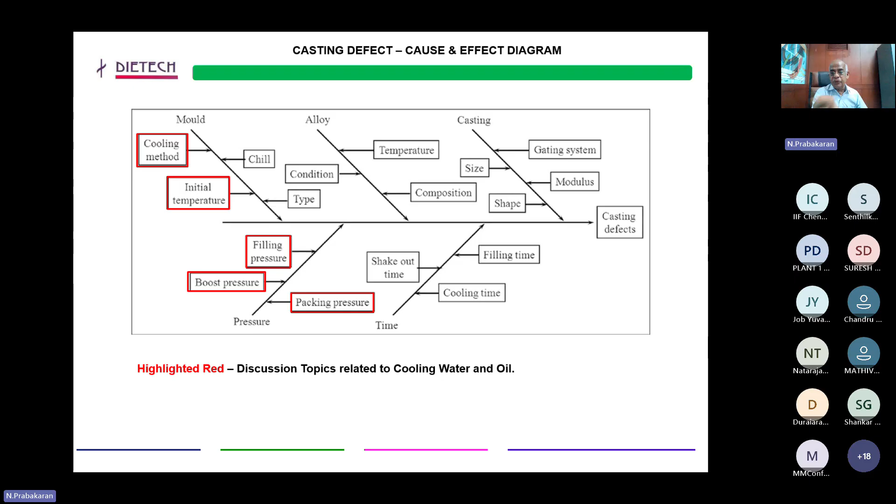What we are talking about is the temperature, the cooling method, filling pressure, and boost pressure, packing pressure. These are all the areas which we are going to concentrate on through die chillers and oil chillers, in turn reducing the rejection level from these elements.

Now I have presented this slide where I am going to show which area I am going to cover regarding the rejections and reduction through die chillers and oil chillers. Probably I will present it in this way.

Probably we will start the cycle at a temperature of 100 degrees. We will have warm-up shots which get rejected, around 10 numbers. From there it goes to the first part approved stage, where the die temperature reaches from 100 to 200 degrees. That 200 degrees is just a reference; according to the casting configuration and other factors, it will vary. I have taken 200 degrees as a reference.

So that stage after warm-up shots, the second stage, is nearly the first part approval stage, which is also 10 to 100 cycles. From those 100 cycles, I'm assuming process parameters are settled, and then casting gives a minimum percentage, around 3 to 4% or 5% rejections.

After that, there will be start and stop stages, which are also included in the production stage itself. If your start and stop time is very less, probably it will not drop below 200 degrees centigrade, and then we can take the further cycles forward.

What the die chiller is going to play a role in is reduction of casting rejections in the production running stage. That is the second stage, and probably the third and fourth stage, as you can see. This stage and this stage is what we are talking about regarding reduction, the production running at this required temperature. This is what I am going to deal with.

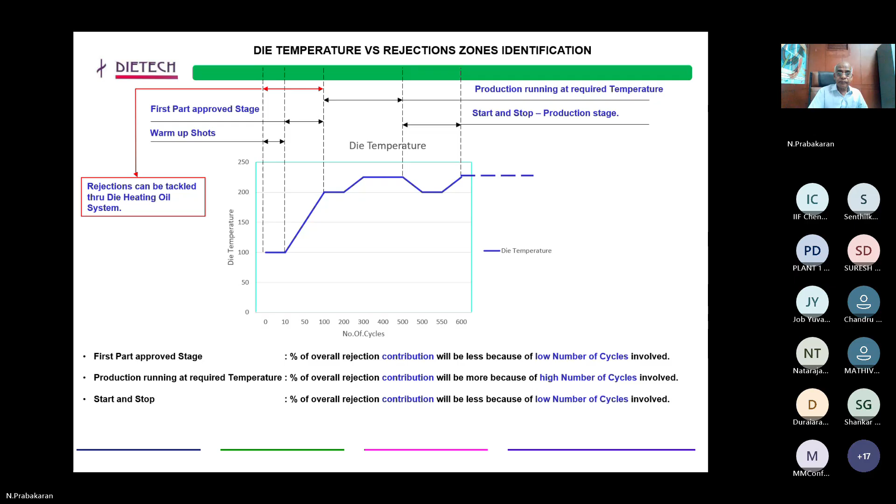Now, normally one more identity - these are all the inputs for further slides. So the die temperature, if I'm doing it through a thermograph, normally the high die temperature lies with the sprue bush and the spreader. Even one more clue I'll give that.

If you want to increase productivity, you want to reduce cycling time, even we can measure biscuit temperature to tackle it, probably improving the cycle time. Normally we used to talk about casting temperature, but rather we can take into account biscuit temperature reduction as one of the ways to go into productivity and reduction of cycle time.

Normally these two zones are always very high temperature; very high temperature will always be there in any die if you are talking about it. The sprue and spreader are the most highest temperature points in the die.

So normally, why am I putting this table in front of you - this analysis shows we could see 80% of the rejections almost coming onto porosity. Porosity is divided into two stages: one is air porosity, another is shrinkage porosity. Apart from that, some rejections we will always be calling - you can see all blue highlighted, all are related to temperature.

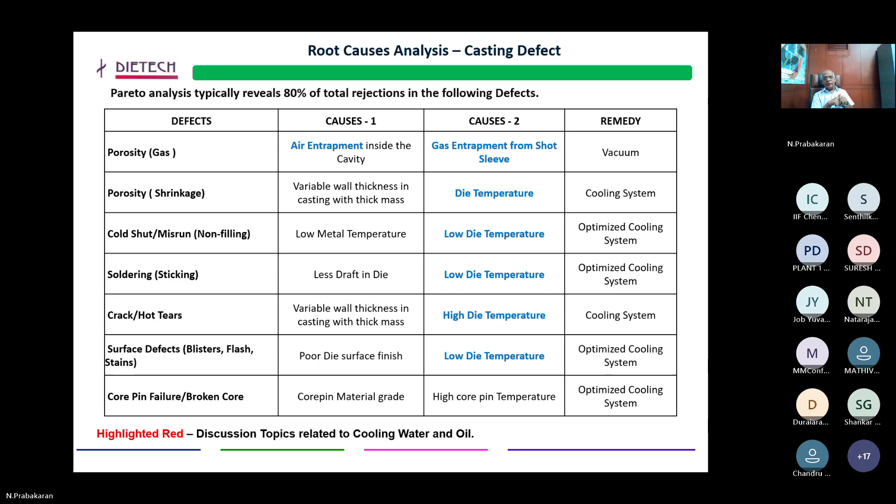Now this is about root cause and other things. These are additional points. Probably people will think I'm going to discuss total rejection reduction overall, but no, it is not so. My purview is only shrinkage related casting defects, how we can reduce it. This is only the essence of this paper. I am highlighting the direction I am going to take, and also highlighting other directions which are not dealt with here.

That's why I am putting up this slide also. The discussion topic relates to cooling only, which is a concurrent factor for first phase and second phase. Poor position of the die, poorly designed - one more thing I am talking about is proper die design.

This is going to be a big subject - how the die can be designed in such a way that less rejections can be produced. Today's requirement is almost nil rejection. That is the approach the die design has to go towards - how the die can produce nil rejections if the process parameters are well controlled.

This is a combination of die design and the process of die casting. Both should work in such a way to reach minimum rejections, even with a target of nil rejections. So probably this will be an eye opener in die casting, what I am saying.

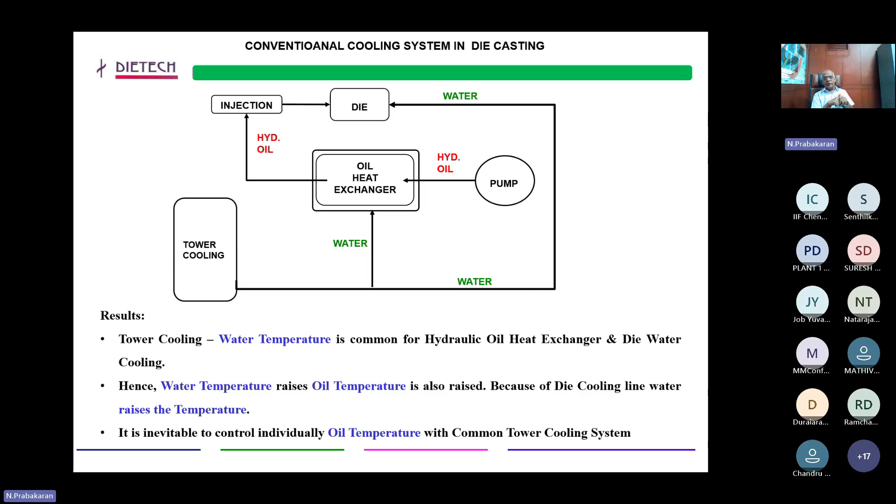This is the improved cooling system. What I want to show is there will be one oil chiller and one die chiller. So oil chiller, this is the die chiller. The die chiller will take care of the die, and the oil chiller will take care of the oil. So it is separated out now.

The total oil heat exchanger is removed. In the chiller, directly the media is oil, going in and coming out. No water is inside. Only oil is taken to the chiller and then gets into the oil tank. So we constantly maintain the temperature, whatever you want, 35 or 40, based on your requirement. This die temperature is in no way connected with the oil temperature. This is the best advantage.

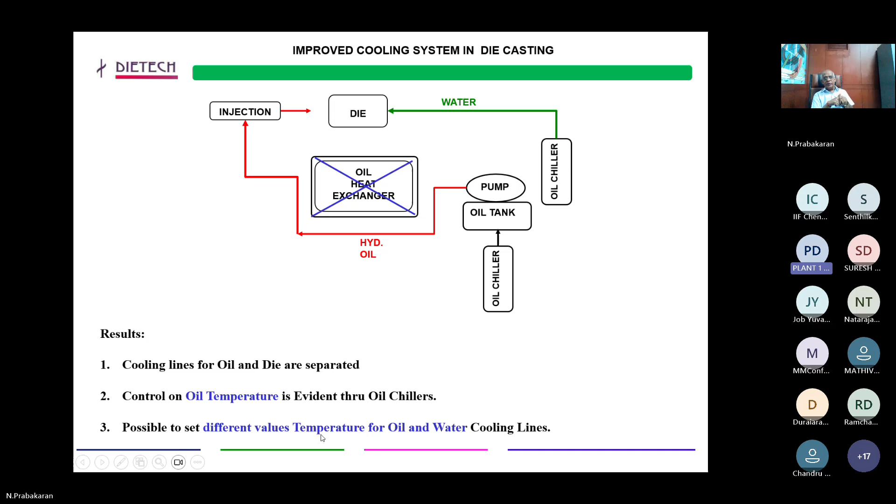And what are the advantages of separating out the chillers? This is a water chiller, this is an oil chiller. Now let me tell you what could happen in oil.

What you can see here, there will be almost a 45-degree slope for this. If the temperature goes up, your viscosity will go up - nothing but the viscosity is reduced. So when the viscosity is reduced, you know very well the pressure drop will be more because of the viscosity reducing, or the viscosity number is more. Your thinness will be more, so your pressure drop will be more. Almost you can say 45 degrees, the slope is very high.

Suppose the slope is only around 10 degrees, there is not much value. But when I'm seeing the pressure drop curve, which is given online, nearly 45 degrees means it's equal - whatever the problem here, this will be transferred into the pressure drop.

So now we can see, if you are raising the oil temperature by 10 degrees, your injection consistency will also vary. Suppose certain castings need not have much sensitivity on the injection side, but for most of the castings - I'm talking about 60 to 70% of castings - if we are able to maintain the injection force consistency equally, then the casting produced will be consistent in quality. So this is very, very important.

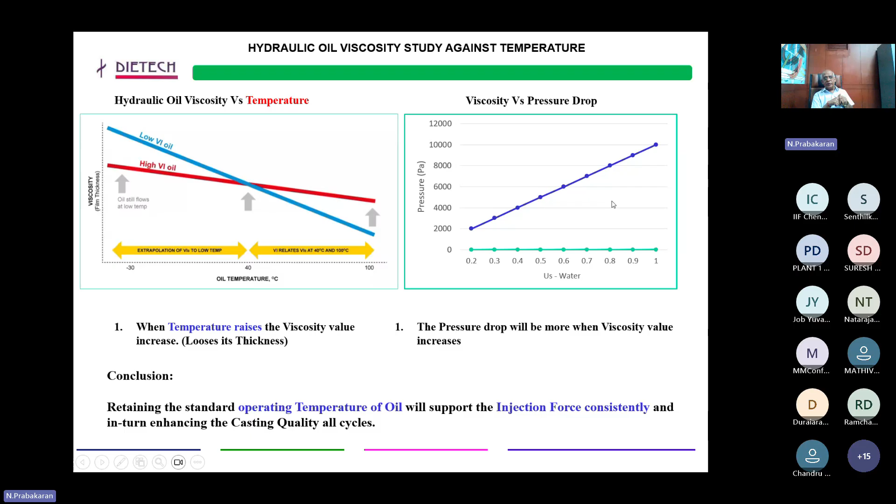We have to maintain the viscosity of the oil, so that pressure drop will not occur, and you will get consistency in the injection force.

Now another function I am talking about is the closed loop circulation system. Closed loop means no pollution will take place in between the chiller and the oil - everything is closed loop. That will be the big advantage. There also is a closed loop, but through an exchanger. But with water cooling only, we used to have a lot of pollution.

You know very well the problem they are facing today in heat exchangers - the cleaning or maintenance is very high because every 3 months or 6 months they have to be cleaned. Otherwise, the oil temperature will go up. All these problems exist today in conventional die casting machines. Conventional cooling systems will have this problem.

And hydraulic oil circulates under pressure - that's another big advantage. It absorbs frictional and mechanical heat. If you're using the hydraulic oil chiller, it will be pumped with a little pressure, 2 bar or 3 bar, because another pump is running inside. So it absorbs frictional and mechanical heat, ensuring the oil retains the designed viscosity and lubricant property.

That is ensuring oil - this is the advantage of that chiller, I'm talking about the oil chiller - maintaining the ideal temperature, typically between 20 to 35 degrees. This is possible, and we can even bring it down below atmospheric temperature. Suppose we want 5% or 10% more injection force, you can slightly increase it by 2 or 3% consistently. If you want more, we can think of reducing the oil temperature further and taking more force.

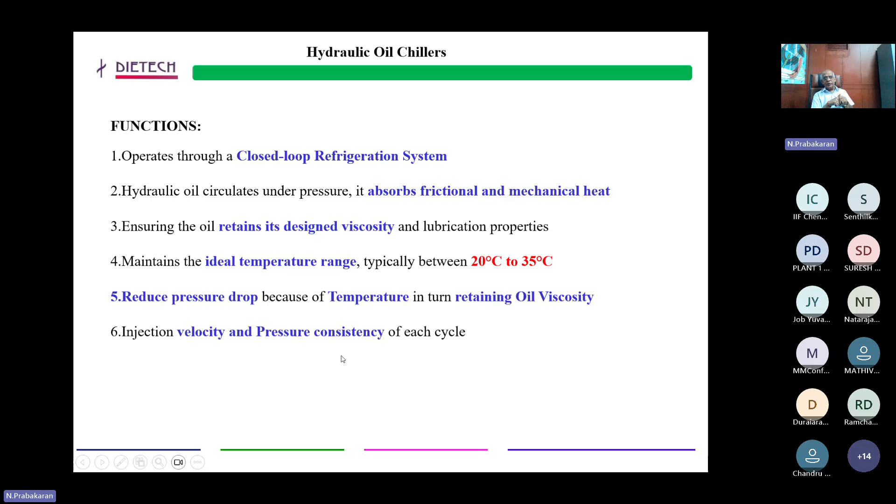Now, add-on advantages - there's more. If you start using an oil chiller, leakage will be totally reduced. Compared to conventional systems without a chiller, with a chiller you will have leakage problems reduced a lot. Since the oil temperature is not reaching too high, it is consistently maintained at 35 degrees. Your oil seals will not have any temperature effect, so leakage sealing will be better and leakage will be less.

And then excessive wear on pumps - pumps also depend upon this. Suppose the pressure drop is there, the vane pumps get slip, and wear and tear will be more. Probably with this, the excessive wear on pumps will be reduced and pump life will be more. Seals and valves will always have a better life. These are all the add-on advantages.

Stable hydraulic oil temperature also helps clamping pressure. This is another advantage - if the same hydraulic oil is used in locking pressure, probably in the die closing cylinder, if we are able to maintain that oil viscosity, the clamping pressure will be consistent. So this is another add-on advantage.

And then normally you can reduce the energy of the pump. If you are able to maintain the oil temperature, your energy losses will be minimum, so your current rating will be less, so your power requirement will be reduced - probably 1 or 2%. I'm not saying it will be a very big thing, but there will be some reduction. That is what I want to say there.

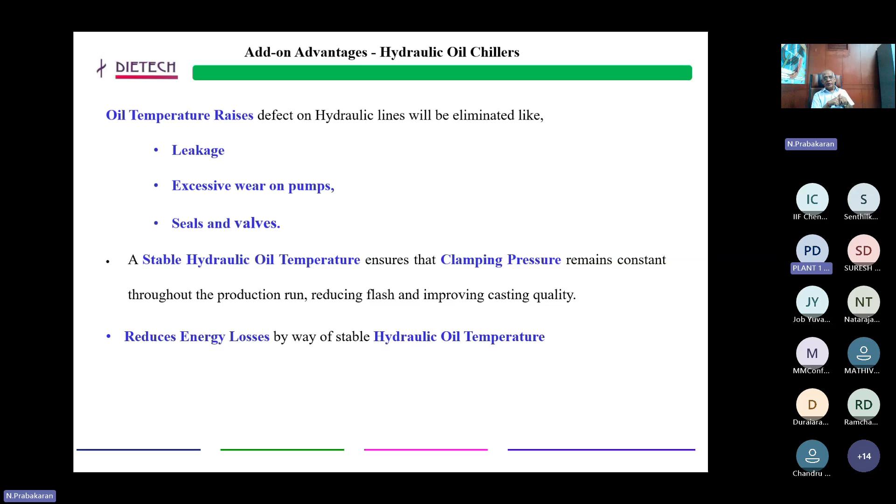Selecting the right oil chiller, yes, this is very, very important. We will have to talk to the supplier about the requirement. Suppose today we get the machine - what I am going to use it for - they will tell the spec of what we will have to use. So we will have to take the input from that.

Buying the chiller is not the only important thing. Since you know how much heat you are going to extract and how much the pump is running, pump capacity - all these things will be taken into account, so that the chiller can be rightly selected according to the need.

Next, oil grade compatibility - probably viscosity range effectively. The oil chiller should have the capability of retaining the viscosity range effectively.

And then one more thing - you should use digital controllers for temperature reading and even for maintaining the refrigeration system and all that.

And then environmental - that is one more zero. We'll have to talk about the oil we are using, whether the refrigeration system should also have zero ozone depletion. These are all the ESG norms. We cannot use any refrigerant we like - there are ESG norms for environmental governance. So based on that, they will select the refrigerant.

And installation type - now, decide between a standalone and centralized system. There are two options: I will have one chiller for the oil chiller, or otherwise I will have one chiller for both heat exchanger and die cooling. So these are all the combinations for selection.

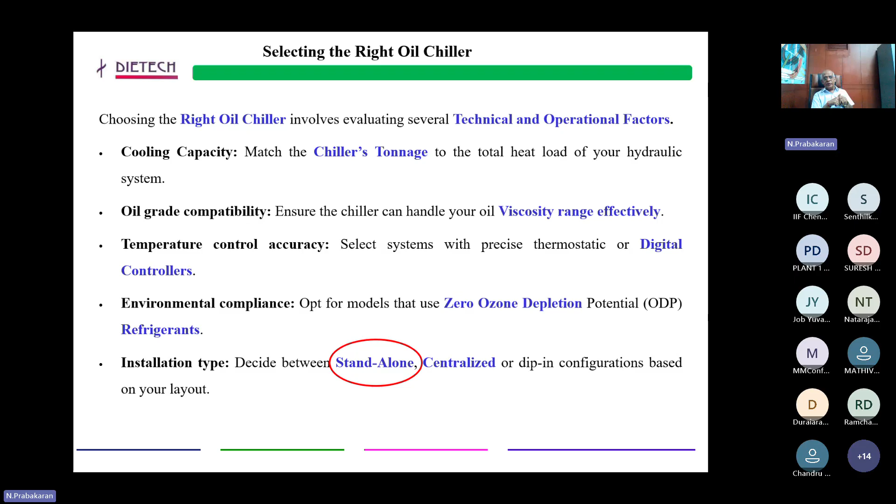Normally I recommend going for a standalone system, because with a centralized system, one breakdown means all other machines will have a problem. So it's probably better to have a replacement ready - if your standby is there, we can use that replacement and immediately start production. Normally it is better to have each machine individually, but according to cost and investment capability, we can select according to requirement.

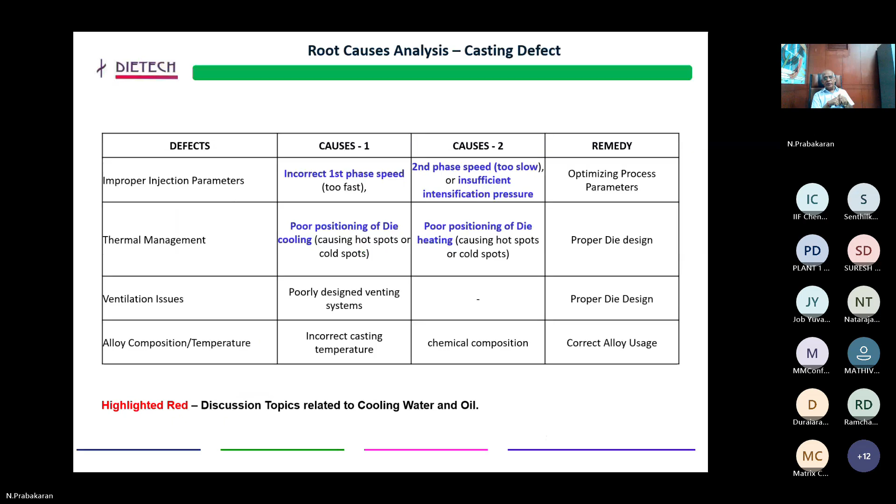Suppose if I'm using regular water cooling, I'll give some water here, and water there. Whatever heat extraction happens will be common for everyone. By adding a number of cooling lines, it can be managed a little.

Suppose you start using the die chiller. From the die chiller, we can have more flow here by giving more pipe and increasing the pressure by 3 to 4 bar. If we increase it, this will take care of both the sprue bush and spreader. But at the same time, this area will get more cool - this is another problem.

Suppose if I'm increasing the flow and pressure here by even reducing the inflow temperature, the challenge is how to maintain this area. This is a big criteria.

What I am saying is when we start using the die chiller, you should have timer cooling and jet cooling, as well as different orifice sizes. So you have three ways of tackling that flow: timer cooling, jet cooling, and continuous cooling. Apart from the continuous cooling, you should have a different orifice, say half an inch or quarter inch.

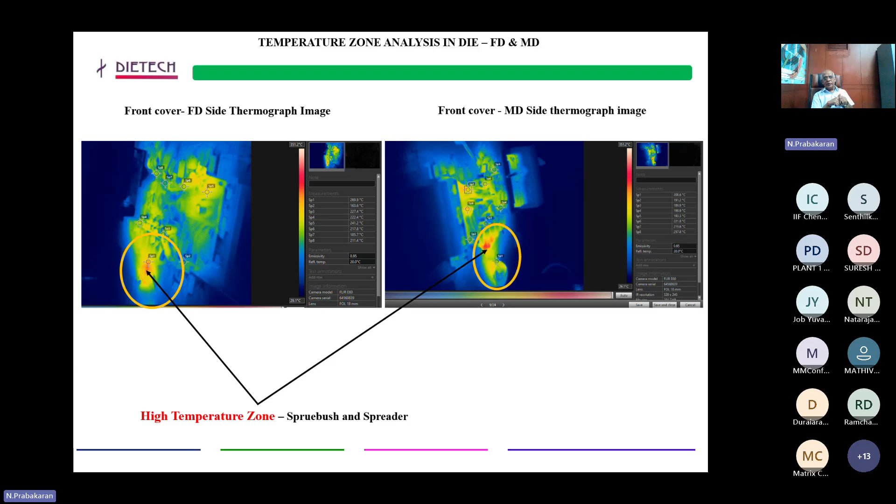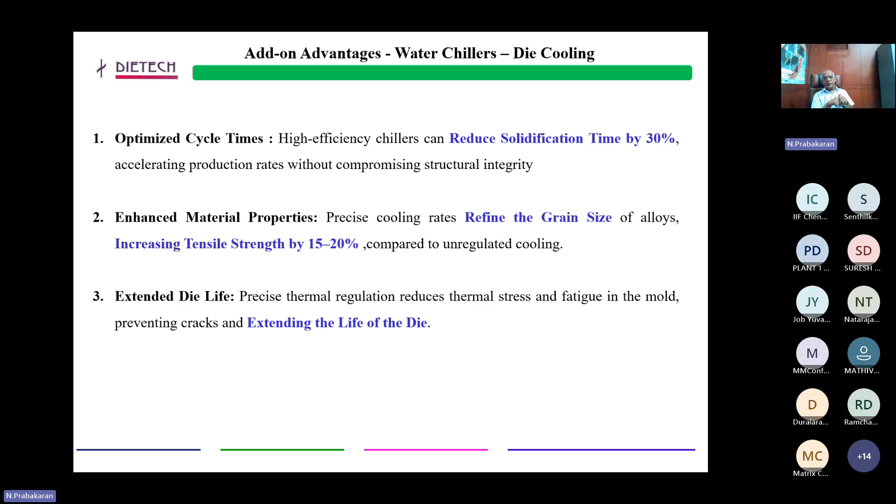This is an add-on advantage: reducing the cycle time, grain size, and extended die life. What I explained is how to manage the die chiller with die thermal balancing, by having timer cooling, jet cooling, and then continuous cooling with flow rate control. Probably these three will help in retaining the temperature.

So just blindly putting the die chiller inside the die will not help. You should have this system as well. Then only will you really get the advantage on the die, and the die chiller will give an effective result.

Probably now I am showing the cool and hot zone of the sprue bush and spreader runner part. The die will have more flow with low and high pressure, and also more flow, high pressure and low temperature of the water.

This area will have control through timer cooling with flow rate control, as well as jet cooling. Probably we will be able to maintain the thermal balancing this way.

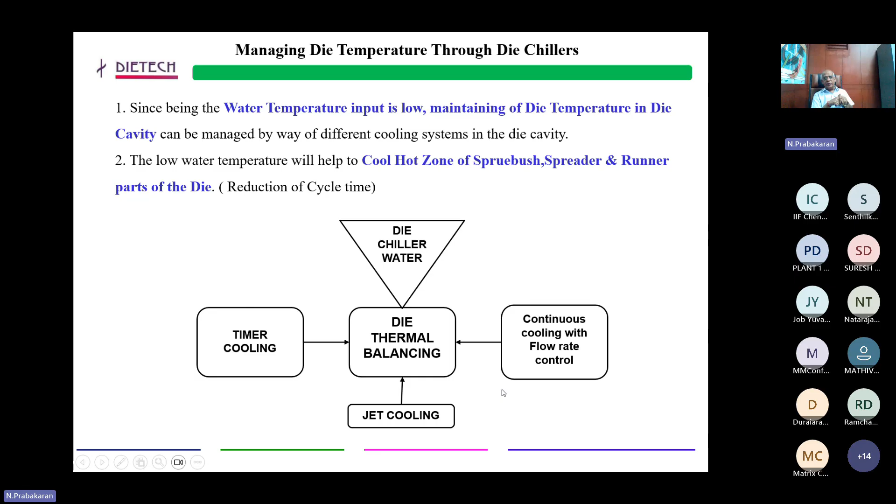Now we know there will be a big problem everywhere: how to maintain all these equipments near the machine. There's a big issue with that, so we found one layout. What we recently developed on the die casting plant, we started using this layout.

What we did: the machine will be there, and a casting trolley, casting conveyor will be there. Probably there will be a pick mat here and all that. There will be a trimming press near to that. These are all on the ground. All other equipment should be lifted above 1.5 or 2 meters.

Like the oil chiller, die chiller, heating line, and even the vacuum line. We can have an air tank here for spray, and even the plastic bead feeder here also, with the control unit. So we can use this bench for all the accessories toward the machine.

Even the cooling system, starting from jet cooling and timer cooling, everything will be placed on top of the stand so that we have less problems. This way you can even have space for putting the casting bin or scrap bin here, so the maintenance will be very easy. If we are not doing this, we will have a lot of problems maintaining these equipments.

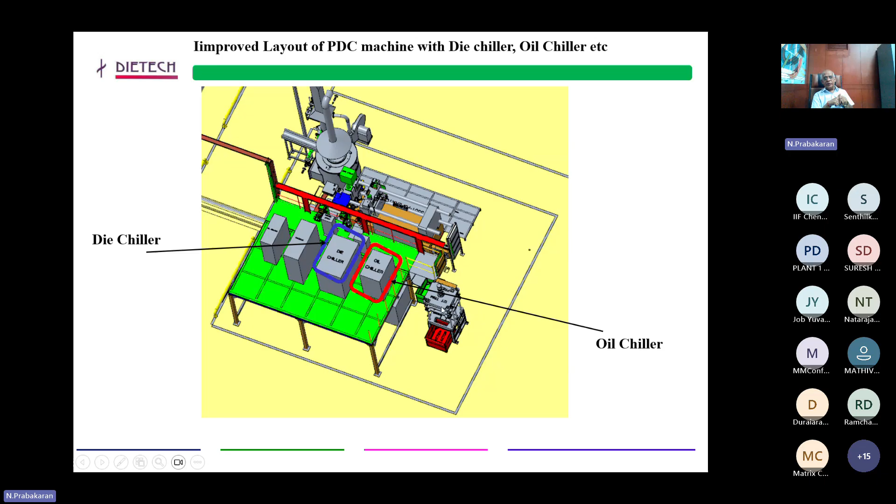So this is the trimming process, and this is the layout we are following. I'll give you an example of that. This is what we did. You can see here all the equipments we have seen.

This is an air tank for the sprayer, this is a heating line, and this is an oil chiller, this is a die chiller, and even the press power pack is also put on top of that. This is a plastic feeder unit. So all the things will be lifted above the machine area, above the side of the machine.

These areas are all used for putting the biscuit and other things, slugs and everything we can keep. So this is the biggest advantage of putting the layout in a different way. Then only we can able to maintain all these equipments.

During maintenance, they can go and attend independently, not having any clustering. But here there will be a lot of clustering, so maintenance approach will be more. The bottom machine is free from all this, so the ground floor is free, meaning we can approach the machine very easily.

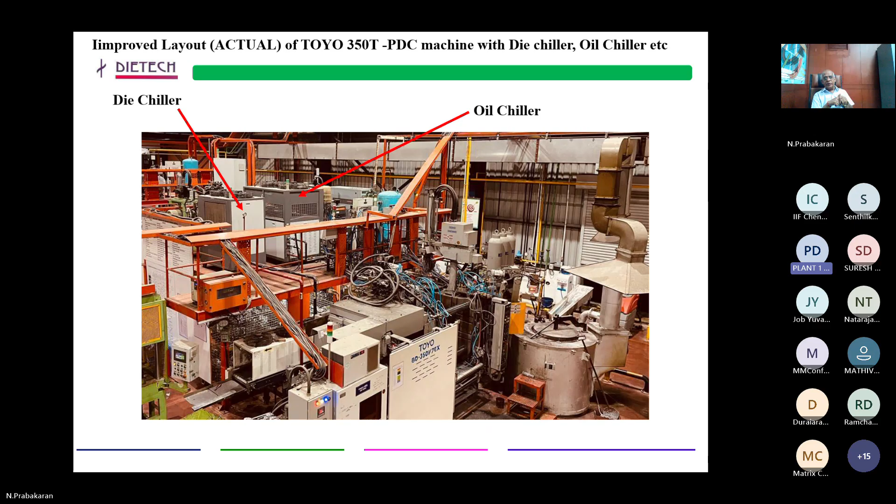Now costing justification is just worked out. I'm taking a 350 ton machine, today's market price, but it's not the right market, what I can say. So expenses will be around what I myself am considering, taking into account power plus capital investment. The chiller, meaning the oil chiller and the die chiller, minus the tower cooling furnace, that is the investment cost coming.

And then power cost, all put together, 2 to 2.5 rupees is coming per shot. This is what we already got as an estimation, which we'll still have to refine. We have not run up to the mark of the production rate. We are only in the stage of PPAP and other things. But anyway, now the shot rate I am taking as 35 rupees.

Cost of chiller per shot is 70 paise or 2 rupees, that is the cost of chiller expense per shot. Probably this data is something wrong, I think. Okay, now overall rejection percentage is 5%, I am taking it.

And then percentage of rejection due to porosity, I will take 50%. From the 5% shrinkage porosity domination is 2.5%. From this, the average number of shots per hour is 60. Now I am taking the average shots as only 1,320 per day, but this is very optimum what I am taking. And the number of casting rejections is around 33 per day.

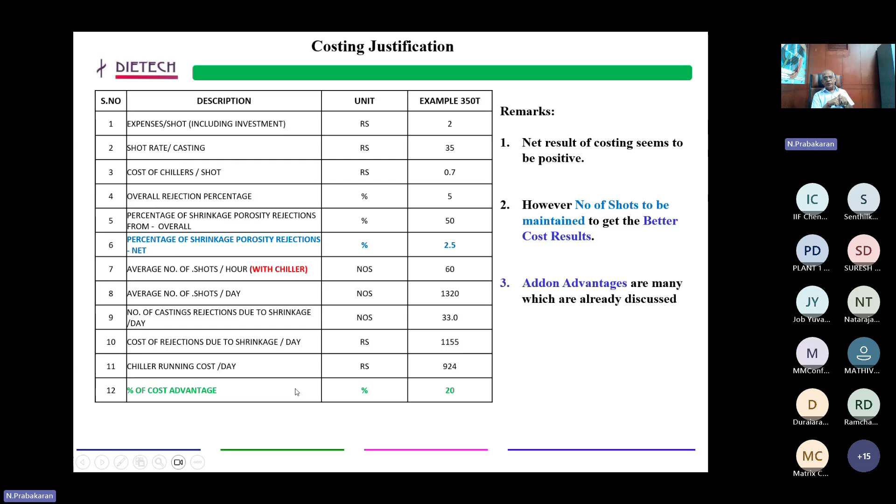So probably we'll have to tackle this figure, 1,320 per day. You should go on increasing more and more, then your chiller power cost will get reduced. Add-on advantages are many, which have already been discussed.

Now, conclusion: chiller will make independent control on oil and die temperature, as we expressed in the previous slides. Productivity is a key factor to recover the cost of chiller and power expenses. You have to assure this, or you will have to make a measurement that productivity is getting increased after induction of oil chiller and die chiller. Then only you can recover the cost of power as well as the investment of chillers.

Different temperatures can be controlled by die chiller, tower cooling, and jacket, as we have explained. And improved layout is a must to maintain the equipments near the machine. Rejection can be controlled with the following equipments in a better way: die chillers, oil chillers, and I am adding oil heating and vacuum also.

Independent die chiller and oil chiller with the respective machine will improve the casting quality. The quality of castings overall enhancement can happen, machining and consistency, and all the above said equipment provisions in the die casting machine. That is what I am insisting on: try to go for all the equipments and facilities near the die casting machine so that overall quality improves and rejections are reduced through process, not by skill.